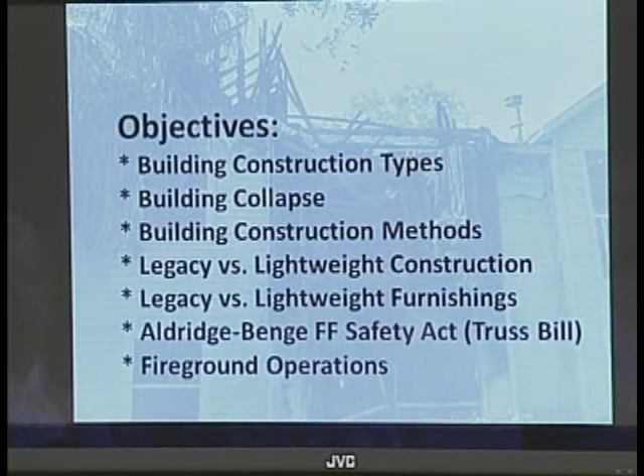Fireground operations, we'll talk quite a bit about that throughout, but at the end we'll get very specific on exactly each of those 3 positions I just mentioned, and we'll evaluate how that applies to you specifically.

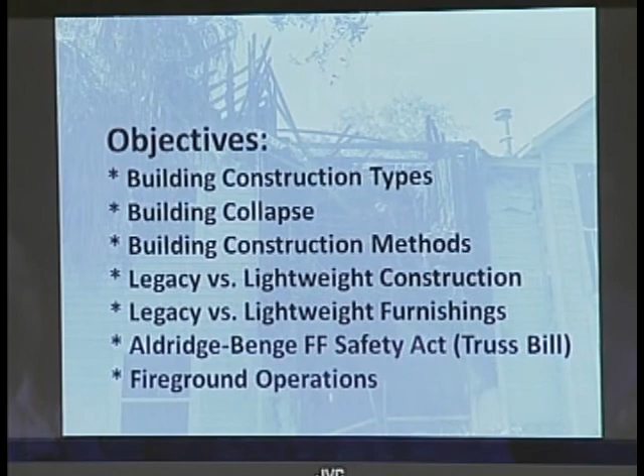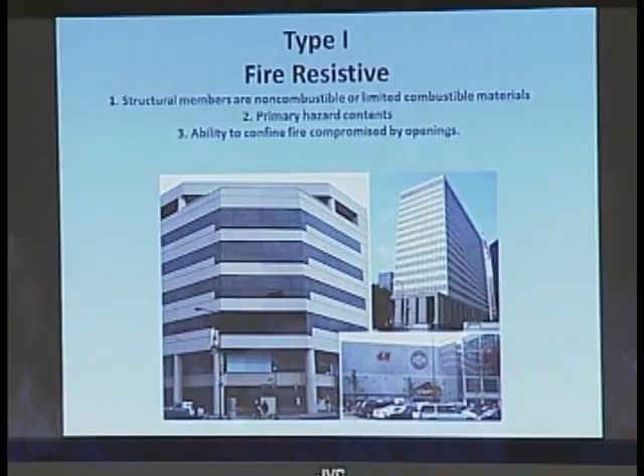I'd like to start off just by going over the various types of construction. This is the National Building Code. There's 5 types of construction. This isn't anything that you should have to have a lot of detail about, but as you advance in your career, it becomes very important because different types of buildings are going to act a different way under fire conditions. So as you advance up as acting officer, as lieutenant, as acting battalion, and running a scene as incident commander, it's going to be more important.

Type 1 is what's called fire resistive construction. This is what you're going to see mostly in your downtown Sarasota area. We're talking about high rises here. Structural members are non-combustible or limited combustible materials. Primary hazard are the contents. Ability to confine fire is usually compromised by openings.

This is usually a type of building that is made of steel, glass, and concrete, and the steel is typically protected in some fashion, whether it's boxed in with drywall or if it has fire retardant sprayed on it, things like this. But fire resistive, type 1.

Type 2 is called non-combustible. It's similar to type 1, only the degree of fire resistance is less. These steel I-beams and so forth may not be protected. It's still made out of non-combustible components, steel, glass, concrete, block, but these components are not necessarily protected.

So it's kind of the next class down from type 1. In some cases, materials with no fire resistance may be used, not combustible materials, but like I said, steel I-beams and things like this. Fire would still have a dramatic effect on that because it's not protected.

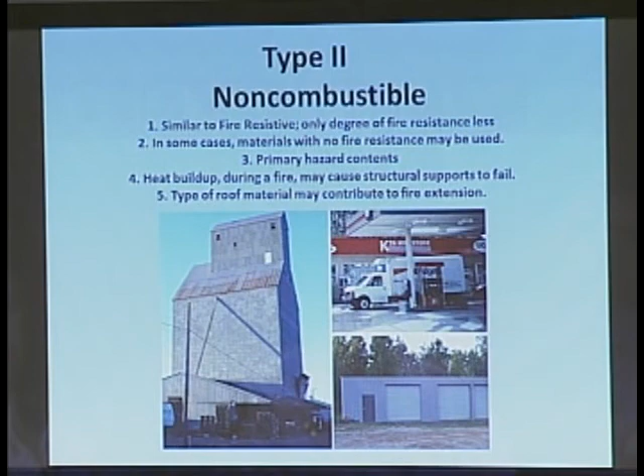Also, the primary hazard would be contents in these types of buildings. Heat buildup during a fire may cause structural supports to fail. Type of roof material may contribute to fire extension, such as if you had a membrane roof, where fire gets up in the roof area and starts running that membrane. Different types of built-up gravel roofs that have tar and so forth may be a factor in a non-combustible building that's on fire.

Type 3, ordinary. This county has many buildings of ordinary construction. This is basically your downtown areas that are not your high-rises, like the Gator Club and those type of areas along Main Street, where you're looking at mortar, brick, some steel, also wood used. That will be dimensional lumber. It will be 2x12s, 4x4s, 6x6s. It's not heavy timber, but lumber is used in these type of buildings.

Exterior walls and structural members are non-combustible or limited combustible. Interior structural members are completely or partially of wood, but it will be dimensional lumber. Wood used has smaller dimensions than heavy timber, as I already mentioned. A primary hazard is fire and smoke spread through concealed spaces. So you still have an issue with fire spreading through these spaces.

The difference that we're going to compare, because this is the legacy construction, so to speak, and then we'll compare that with the lightweight, and you'll be able to recognize the difference. Matter of fact, I know that most of you already know the differences. We'll get into those in a little bit and do a little comparison. But that's your downtown older areas, is ordinary type 3 construction.

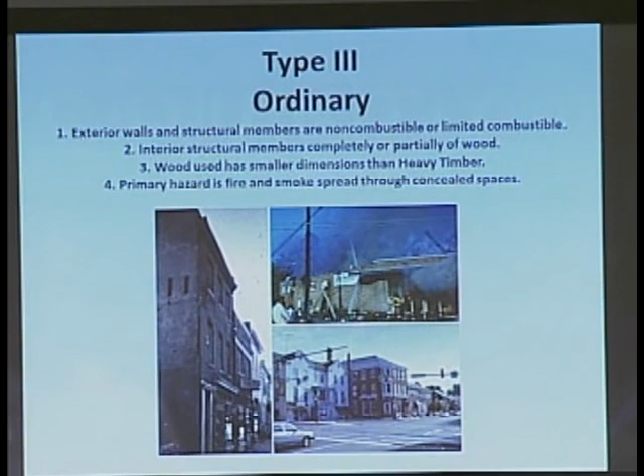Next you have heavy timber. It is exactly what it says there. That's what it's made of. The main structural components are going to be heavy timber. These are typically the mills and factories and so forth up north, but you probably have some of these in your county. Certainly not a tremendous number of them, but you probably do have some heavy timber buildings in your area.

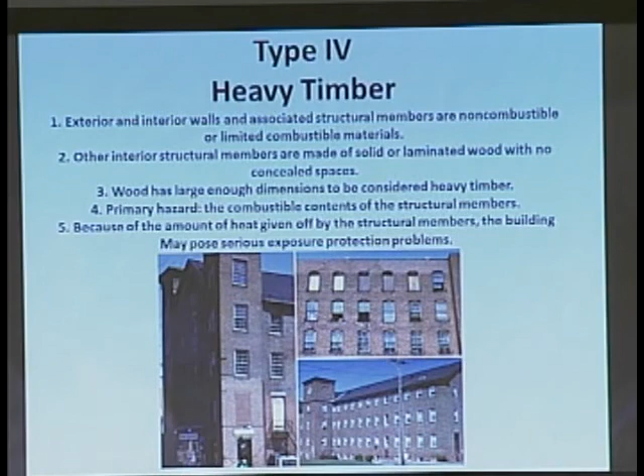These are the type of buildings that you see on Firehouse or fireengineering.com or in the magazines, where you got warehouses like that and you got every window lit up. Those would be a heavy timber type of construction method where everything got going in there and a lot of components to burn. Exterior and interior walls, associated structural members are non-combustible or limited combustible materials.

So in addition to heavy timber, you're going to have some of these steel I-beams. You're not going to have the lightweight bar joists or any lightweight components like that. You're going to have heavy steel in addition to the heavy timber. In other words, they may use the timber as columns, and they may use the structural steel as beams, something like that. Other interior structural members are made of solid or laminated wood with no concealed spaces, as I just mentioned. Wood has large enough dimensions to be considered heavy timber.

The primary hazard would be the contents and the structural members themselves. Like I said, you get a 10 by 10 wood beam that's 50 years old and it's exposed to fire. That's going to be plenty of fuel. It's going to take a long time to burn through, but it's going to provide plenty of fuel for the fire. Because of the amount of heat given off by the structural members, the building may pose serious exposure protection problems as well as collapse problems down the road as the fire progresses. So that's heavy timber, type 4.

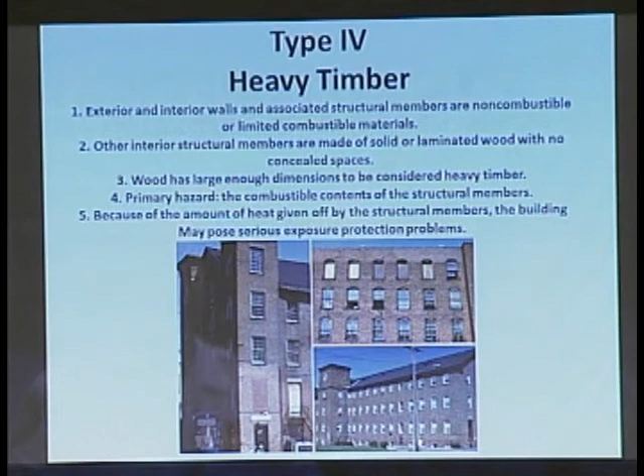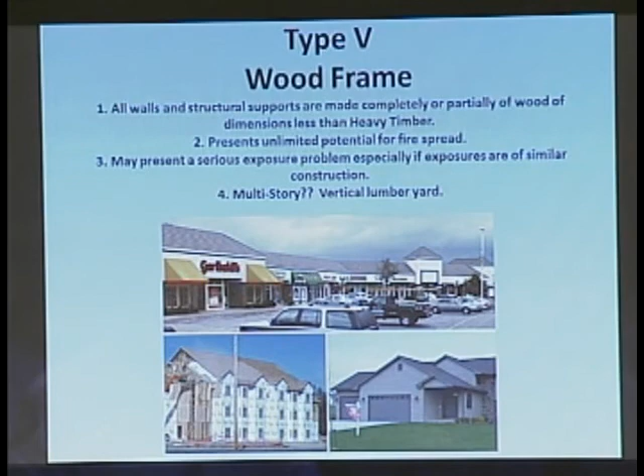Type 5 is wood frame. All walls and structural supports are made completely or partially of wood of dimensions less than heavy timber. Now notice it doesn't give you, okay, this is heavy timber, 8 by 8, and this is not. But that is a call that is made by the building official looking at the plans on how a building is constructed. It presents unlimited potential for fire spread and may present a serious exposure problem, especially if exposures are of similar construction, which they typically are.

And if it's a multi-story, like the bottom left picture you see there, a lot of times that's referred to as a vertical lumber yard, especially when it's under construction. Everything's open, everything's exposed, and you can have severe, devastating fires like Tampa had several years ago at an apartment complex under construction. They had like a 5-alarm fire where it just went from one building to the other. Everything was open, exposed, and of course, at the time, there were water supply problems. That's something you'll typically find at a construction site.

Now, several years ago, everything was going gangbusters with building in Sarasota, Manatee County. Kind of calmed down now, but you could have these complexes with 30, 40 apartment buildings, 3-story or so, going on. And what about hydrants? You know, are the hydrants in service yet? So that's something the fire prevention folks need to deal with, because you get a complex of buildings like that going and you don't have water supply, you got major problems.

So some of the fire service also say there should be a type 6 construction for light frame, lightweight. These are lighter components, but a wood frame building that is built of dimensional lumber and framed out like the old days, which we're going to get into, would be different. That would be wood frame versus if it's all lightweight components like some that we're going to look at. Some advocate that there be a type 6 construction, but officially there's only 5 types.

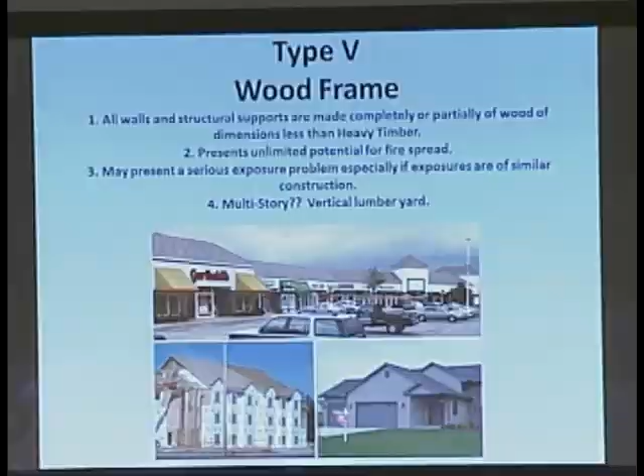All right, let's talk about the issue of building collapse. That's going to be our umbrella, okay, building collapse. And we're going to refine this right on down to where we want to talk about today. First of all, I'll divide it into 2 different types. One is going to be building collapse due to other than fire, and then there's going to be building collapse due to fire. So let's talk about briefly, and then we won't talk about it anymore, collapse not due to fire. What are some of the reasons that a building may collapse other than fire?

Anything? Yes? Wind. Wind, be it direct straight line wind. It could be tornado, could be hurricane. So wind has multiple. Anything else? Maybe poor engineering. Okay, poor engineering where you have a structural failure, specifically under construction, which happened some years ago, I believe, at the parking garage of the hospital here in Sarasota. Yes? Age of the building? Okay, the age of the building, and we're going to take a look at a building that's been sitting vacant in Detroit for years and years, and you'll see that gravity's going to have its way with that building pretty soon. So absolutely, yes. What else?

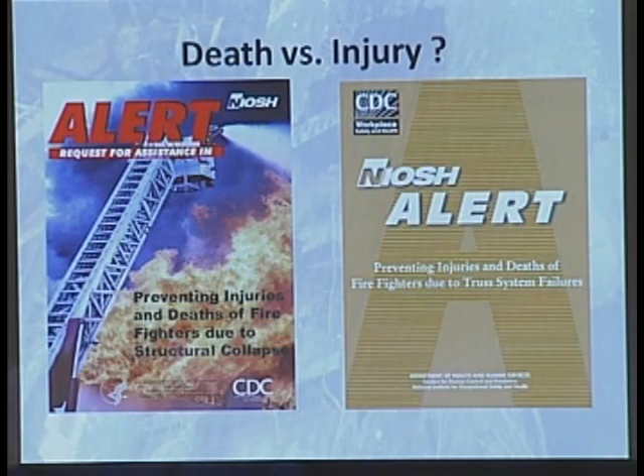And the one on the left, Preventing Injury and Death of Firefighters Due to Structural Collapse in General. These documents are something you should print out, have in your station, and every once in a while take a look at. Great information. But what I want to glean out of this is death versus injury, because most of us fear the letters LODD, line of duty death. That's the worst it can get in our line of work, and it happens to about 100 of us every year across this country.

But I'd like you to take a look at injury. Now, I already kind of gave you the answer. Most of the time I'll ask the students how many firefighters are killed in any given year, and several will know it's about 100. But if I ask how many firefighters are injured on the job in a given year, that's not really a statistic that's thrown out there unless you really study it. So that to me is equally important.

So Mike, is it? Yes, sir. Mike's been on the job for 14 months. How old are you, Mike? 26. Is this something you looked at for a long time to get on the fire department? Probably 5, 6 years. 5, 6 years going to school, preparing, saying this is what I want to do. Is it in your family? Yes, sir, my uncle. That's typically what we see. So it's something you really strive for, work hard for, and here you are, 14 months in, and it's great, right? Yes, sir. That's what most firefighters tell us. It's a great career. Being at the other end of that career, I can tell you the whole ride's going to be pretty good, except if something like this happens.

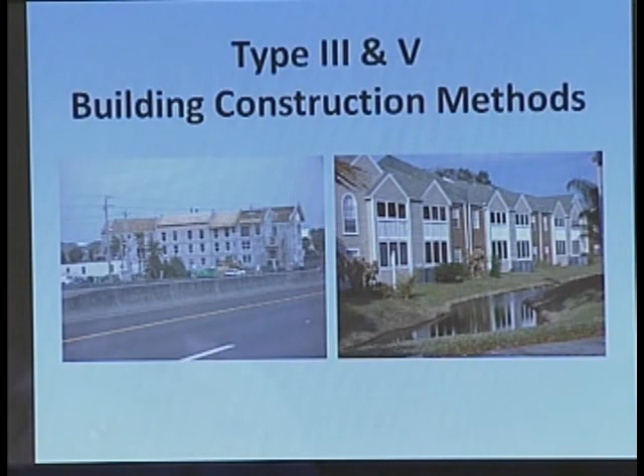We got block, we got wood being used, we do have some lightweight trusses, we have some OSB board being used for the wood roof decking, and on the right, this is all wood frame. What about the brickwork here? What about the brickwork on that building? Is that real brick, you think? This was built 10 years ago.

No, it's a veneer. It's just stucco. And then they run these grates through it and make it look like brick and paint it up a little bit. So, we don't want to be fooled by that. That's why it's important to look at these construction sites when they're being built. You can look at that and go, no, we know that's all wood frame building. So we're going to be talking about a type 3 and a type 5 building here.

All right, and we're going to be talking mainly about floor and roof support systems because that's where these lightweight components are coming into play, and that's where you're going to have problems with people falling through or having them fall on them, firefighters being killed. And the lightweight components are a major part of that problem.

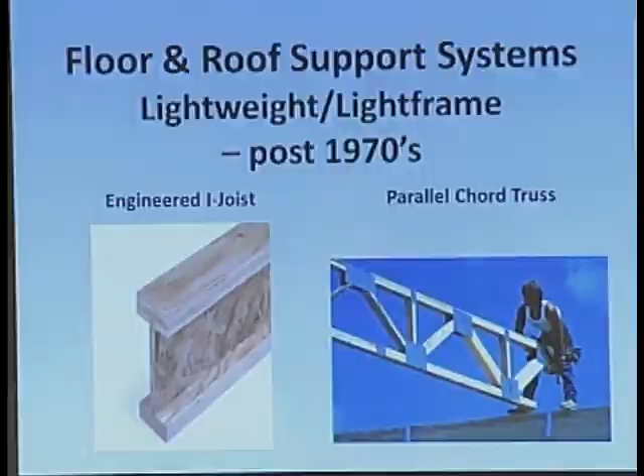And then you have this brand new XJ85 by Georgia Pacific, which has all these openings already in place. Now, I could tell just by looking at it that even if I was given a choice of the one on the left there or the one on the right there, I'll take this one because it doesn't already have holes in it. Because the holes are not only going to be an issue with strength, the holes are going to be an issue with fire spread also. So these are things that if you've studied this and looked at these issues or read articles or read Brannigan's book, that we're already on to. So this would be good reinforcement.

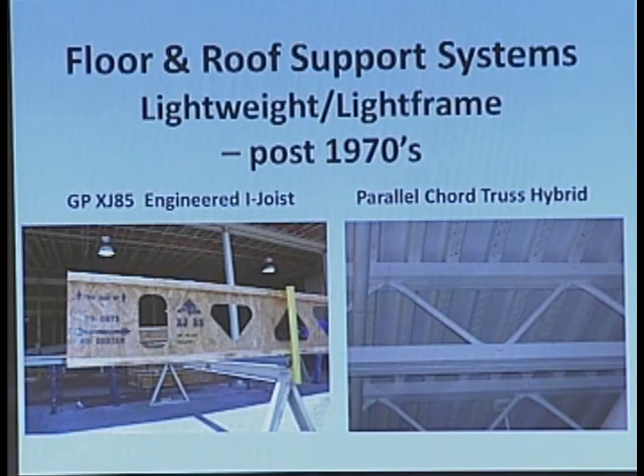Look at this one on the right. This is taken at Northport Fire Department in their training room. All I had to do was look up. There they were. This is a parallel chord truss hybrid. What are the webs in the middle made of? Metal? Yeah, tubular steel. Not even solid steel. And the top and bottom chord is made of what? It's wood. It's a hybrid. You got wood and steel together in this particular truss. It's all lightweight stuff, and we're going to look at an incident where these failed, that killed a firefighter, here in a little bit. We learned by all the mistakes that others have made.

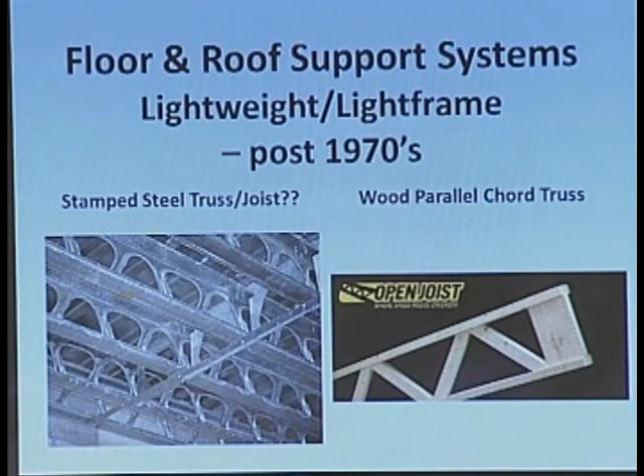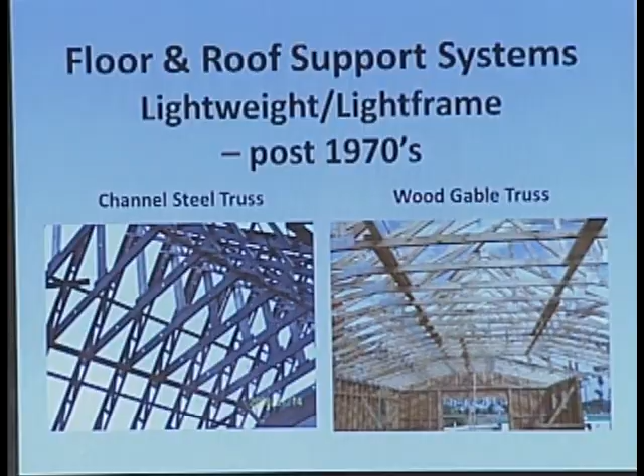Then you also have steel trusses on the left there. The bar joist is very common, like you go to Walmart, look up, or Home Depot. You get the parallel chord steel bar joists in most cases. But there's all kinds of different metal truss systems that are being used out there today. This is a channel steel. That's not solid. It's just a channel steel, like you use a steel stud building a home. It's that type of C-channel steel. Or it may be four-sided, but it's hollow, it's lightweight, it's light frame.

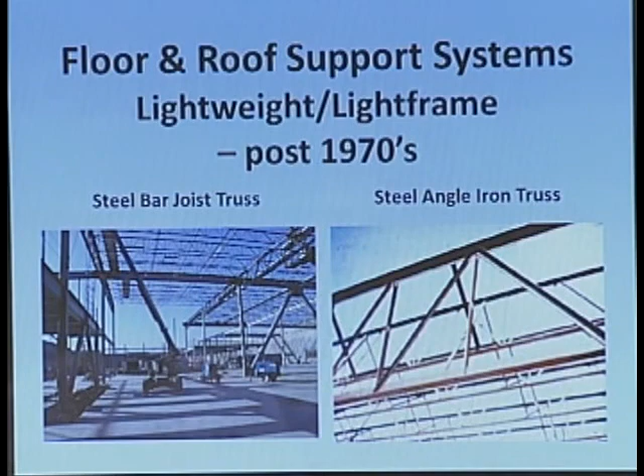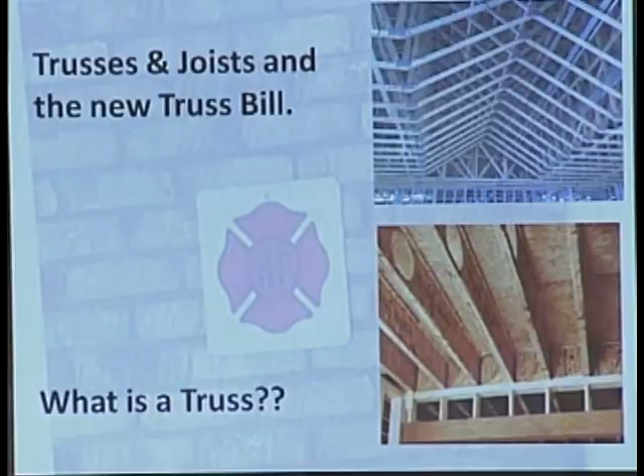Now, before I go any further, I want to let you know, first of all, what is a truss for our class? What are we talking about? A truss is any type of structural component that holds up a floor or a roof that is made from a repetitive system of triangles. Right? That's going to be real important, especially to the chief here, because the truss bill only covers trusses. It does not cover these engineered I-joists because they are not trusses.

And in one of the films we'll look at, one of the instructors is going to say that that engineered I-joist is a truss. It's not. Just remember, a repetitive system of triangles. If it's a repetitive system of triangles, which gives that component its makeup and strength, then it's a truss, and it will be covered by the truss bill that we'll go into detail on at the end. But not all the components we're looking at will be part of this truss bill.

So with that said, let's take a look at a video here. We're looking at legacy versus lightweight construction under fire conditions. This is up in Loudoun County, Virginia.

Two house fires, both in Leesburg, Virginia, but with two very different outcomes. One house burned to the ground, the other didn't. And the reason may have to do with the age of those homes. And Dave Statter explains, in this case, newer isn't always better. This is what firefighters in Leesburg saw when they pulled up on Seton Court this morning. They didn't have a chance to try and save this house. It is believed to have started on the outside and spread up into the attic.

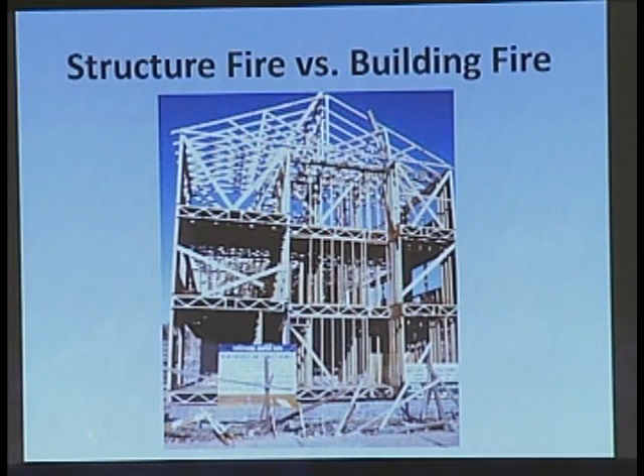So, I've already kind of alluded to it, but let's jump in it a little bit deeper. Other than time, the main issue is going to be, is it a building fire, meaning the contents are on fire, or is it a structural fire, meaning those structural components are burning? Okay? So the incident commander, what is it that you're always wanting to know when you got crews in a home knocking a fire down?

What kind of extension do I have? What kind of extension? That's why. Because he knows that if it extends into these structural components, ooh, we got a problem now. This building could collapse now. If it's just, hey, we got a room of contents, it didn't spread anywhere, the building's not falling down. So this is what's important.

Now, if you read Brannigan's book, Building Construction for the Fire Service, and Mr. Brannigan passed some years ago, but I had the pleasure of meeting him and talking to him. And now the newest edition is out, and it is also co-written or edited by Glenn Corbett, who's a professor at John Jay College, and he's a firefighter up in New Jersey. And he's a whiz with all this architectural, building construction, design, engineering, and all that. So this book has been updated and it's certainly still valid.

And in every issue, the same thing has been in there. And that is a suggestion for fire departments across the country that you designate the difference between a building fire and a structure fire. When you guys are toned out, the building down the road is on fire. What is it toning you out for? What is it saying over the speakers? What? Structure. It's saying structure, same in Manatee County.